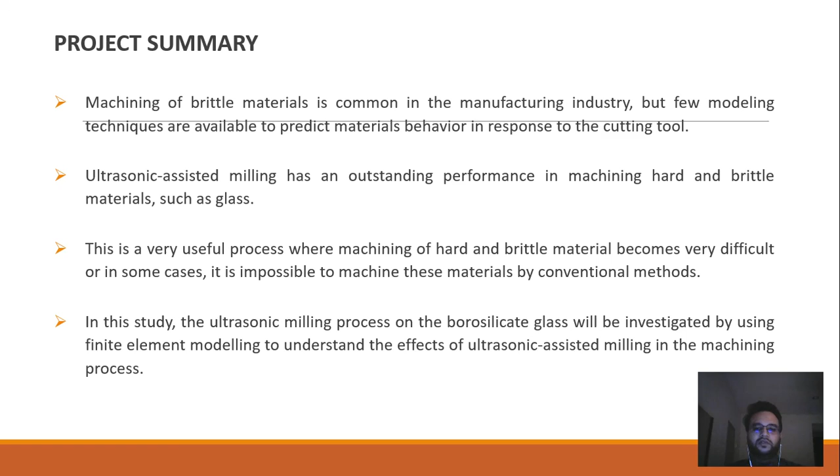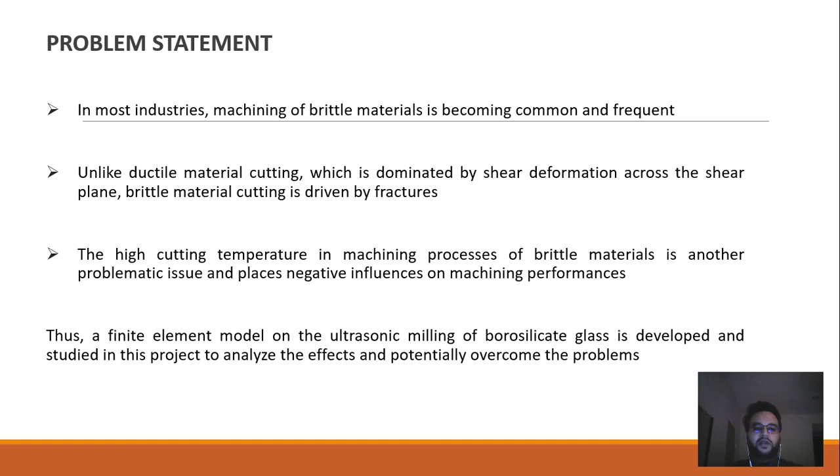Moving on to the problem statement. In most industries, machining of brittle materials is becoming common and frequent. Unlike ductile material cutting, which is dominated by shear deformation across the shear plane, brittle material cutting is driven by fractures. The high cutting temperature in machining processes of brittle materials is another problematic issue and places negative influences on machining performance. Thus, a finite element model on the ultrasonic milling of borosilicate glass is developed and studied in this project to analyze the effects and potentially overcome the problems.

Moving on to the objectives of this project. The first objective is to model an ultrasonic assisted milling process for borosilicate glass using finite element modeling, done using Abaqus software. The next objective is to investigate the effects of the ultrasonic assisted milling process on borosilicate glass, mainly focusing on whether the borosilicate glass is damaged or cracked during the cutting process. The last objective is to validate the ultrasonic assisted milling model with the results of a journal article.

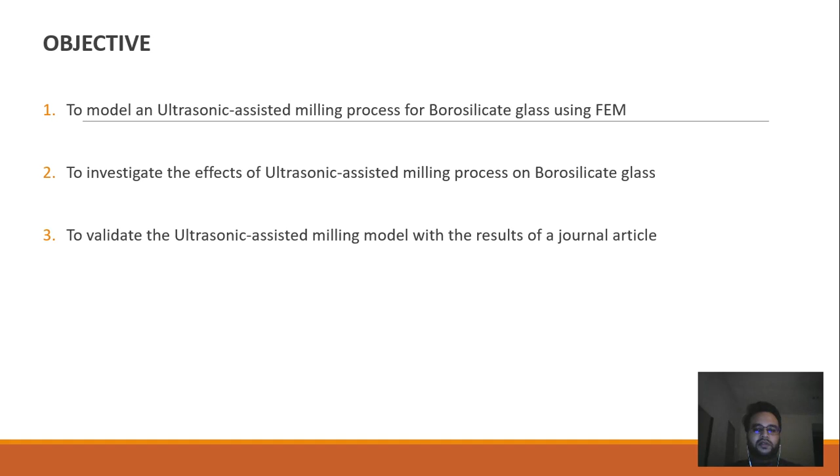Moving on to the project scope and limitations. The scope of this study focuses on creating a suitable finite element model that can undergo the machining process where the tool is able to cut the workpiece as intended. The workpiece with the properties of borosilicate glass is used in the finite element modeling. Some limitations and considerations need to be focused on for the finite element modeling to be successful, such as the type of material, the design or shape of the tool, the input parameters used in the simulation, and the response parameters such as cutting rate, force, and chip formation.

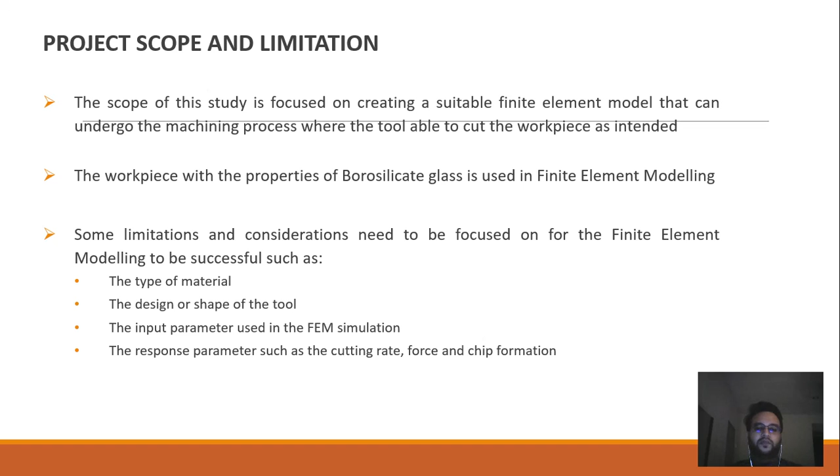Moving on to the literature review. The first literature review is on finite element modeling, which is a simulating process to determine response parameters of the machining process, such as cutting force and chip formation, assessed using the finite element method. Finite element modeling consists of two components: pre-processing and post-processing. Mesh size and order are crucial to create a balance between accuracy of results and runtime. In pre-processing, the main focuses are to assign the type of element, insert material properties, use appropriate mesh elements, and apply boundary conditions in the form of load and structure. In post-processing, the main focus is to generate the desired output or results, such as the cutting force, accurately.

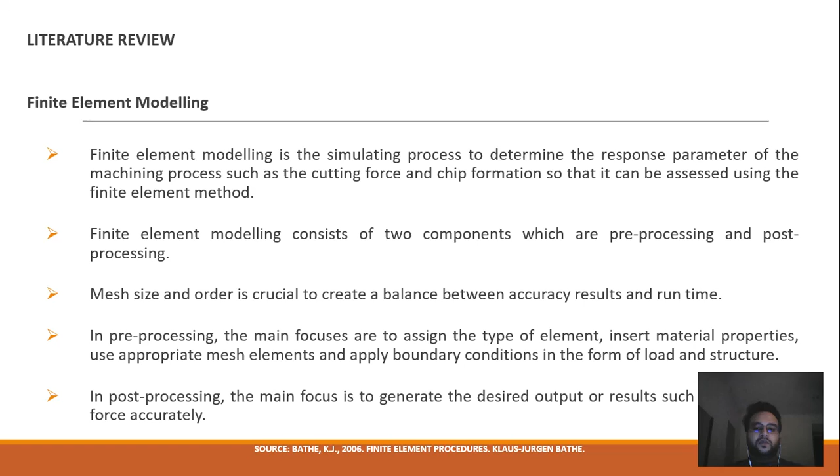The next literature review is on failure criteria and cutting force. Machining of titanium alloy was investigated by 2D finite element analysis to understand the effects of ultrasonic machining. The workpiece material of titanium alloy was modeled as plastic, and to observe the effect of failure criteria, conventional turning simulations were run with and without failure criteria. Serrated chip formation is obtained in simulations with failure criteria, while chip shape is smooth in simulations without failure criteria.

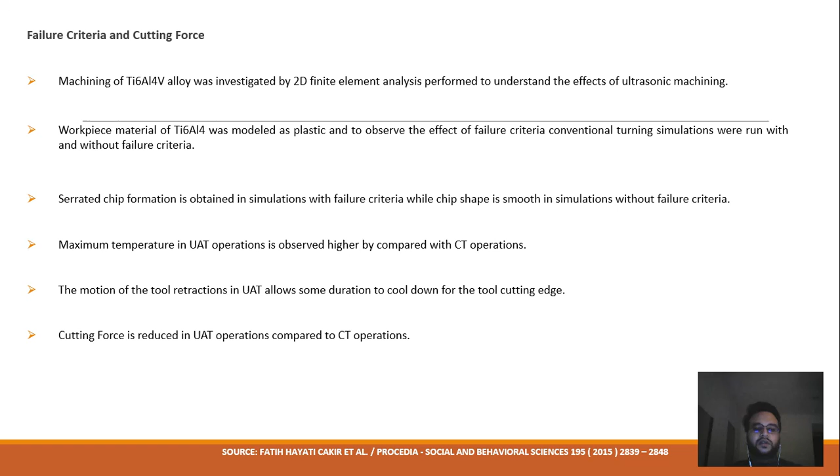Maximum temperature in ultrasonic assisted turning operations is higher compared with conventional turning operations. The motion of tool retractions in ultrasonic assisted turning allows some duration to cool down the tool cutting edge. Cutting force is reduced in ultrasonic assisted turning operations compared to conventional turning operations. This is the cutting force for conventional turning and ultrasonic assisted turning for the titanium alloy, as done in the previous literature review.

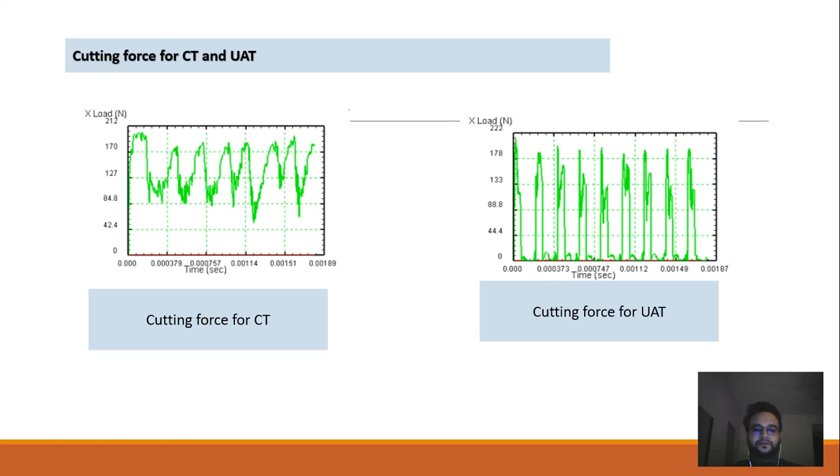Moving on to the methodology of this project. The first step is to do research and data collection. In this step, all the machining parameters and properties of the workpiece and tool are researched and collected. Then, testing the finite element model in Abaqus takes place, done by referring to journal articles, researchers, and also the internet.

Next, we move on to create the finite element model, where all the data from the research and data collection step is used to create the model, run the simulation, and observe the cutting process. If this step is successful, we move on to the last step, analyzing the data. If not successful, it is required to start the step from the beginning. The last step is analyzing the data, where all the data is analyzed and compared with other data from researchers and the internet.

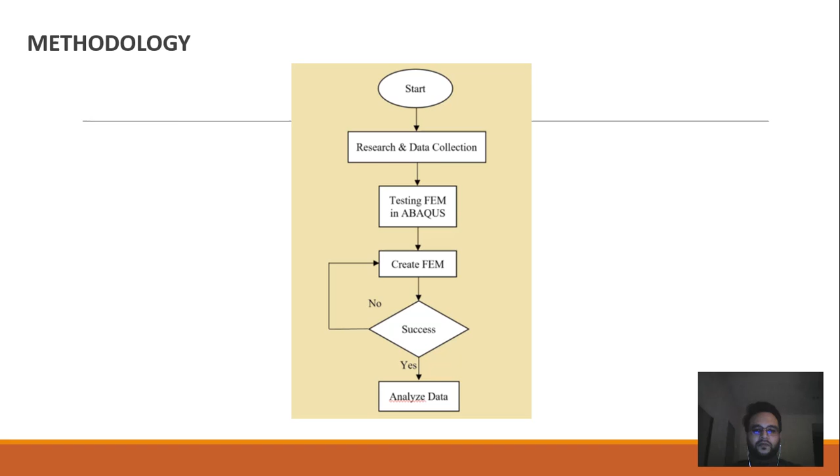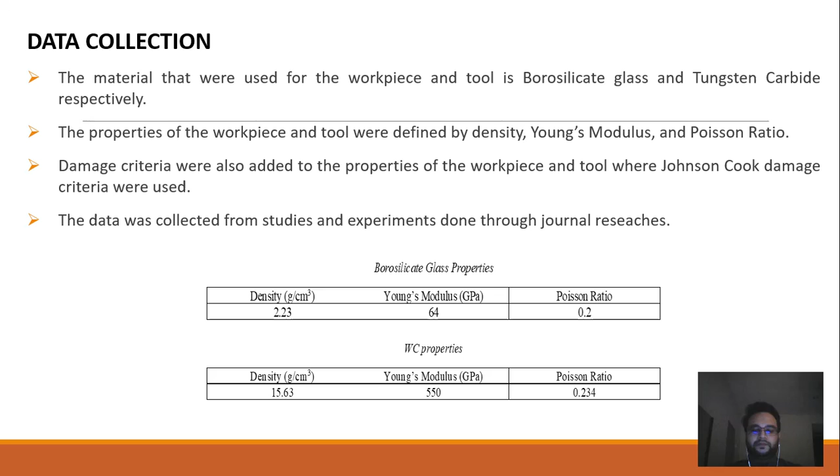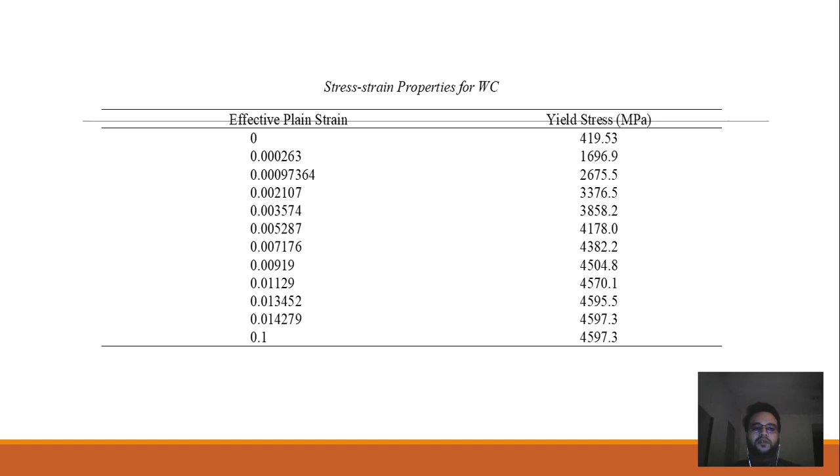This is the stress-strain properties for the tungsten carbide, which is the tool. As you can see, as the effective plane strain increases, the yield stress also increases. This property was referred from researchers and the internet.

The Johnson-Cook damage failure model was added into the finite element model to account for the chip separation process. This allowed the cutting tool to move freely without causing substantial mesh distortion near the tool tip.

D1 is the initial failure strain, D2 is the exponential factor, D3 is the triaxiality factor, D4 is the strain rate factor, and D5 is the temperature factor.

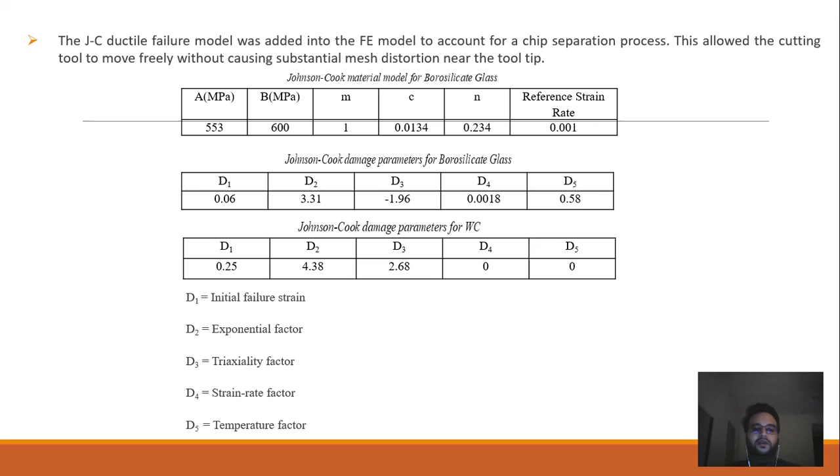The workpiece has a length of 5 mm and a width of 4 mm, the velocity of the cutting tool is 90 m per minute, and the depth of cut is 0.1 mm.

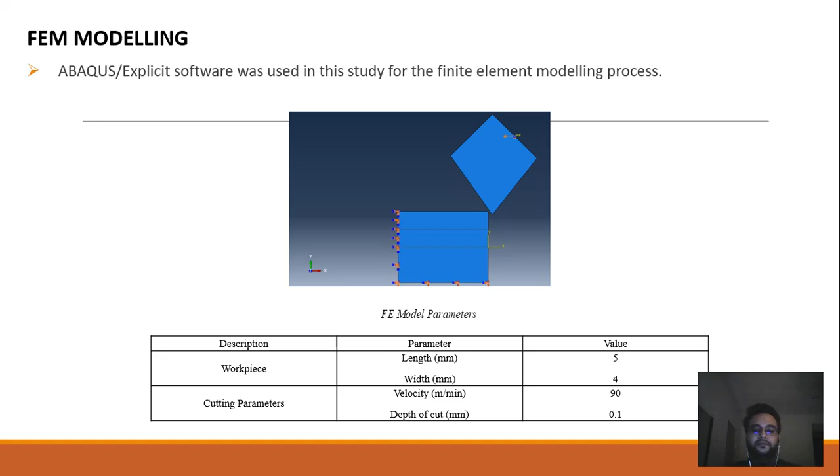As for the mesh, the workpiece is divided into 3 parts. The top part, where the cutting process takes place, has an element size of 0.00005, the middle part has an element size of 0.001, and the bottom part has an element size of 0.00025.

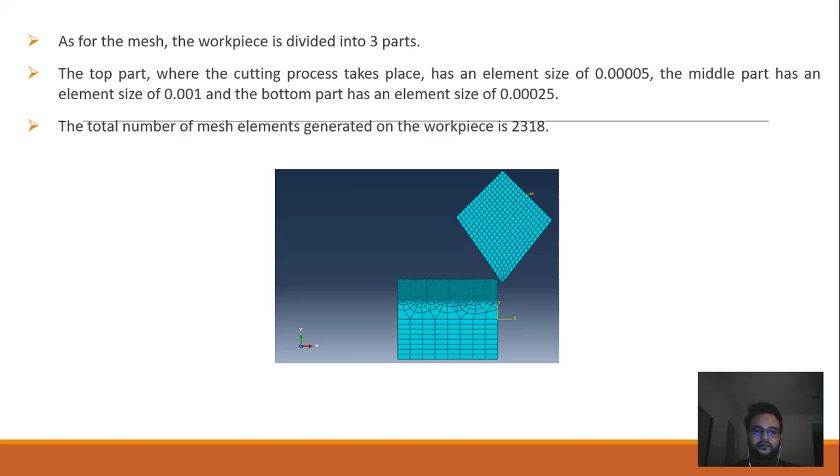Next, we move on to the results and discussion. The first result achieved is that the tool is able to undergo the cutting process on the borosilicate glass without causing any damage. Reduction in simulation time was achieved by reducing excessive distortion in the chip separation region.

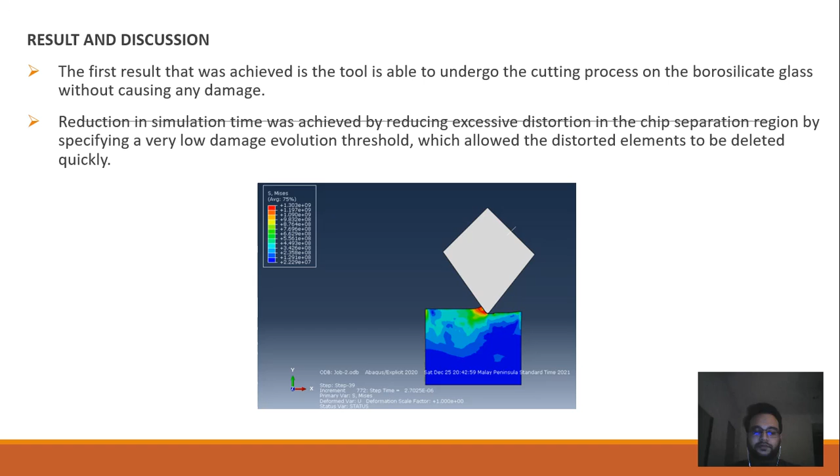Chip creation must be accompanied by fracture criteria that may be used to determine when the material is separated from the workpiece, resulting in the production of chips.

The figure below shows the finite element model simulation of the cutting process with damage criteria, which is the Johnson-Cook damage criteria defined on the workpiece.

This shows that the results of the cutting simulation are more accurate as it resembles the actual cutting process and could predict the actual material behavior during the cutting process in real life or experiments. Therefore, damage criteria are an essential feature to be defined in material properties for finite element modeling and simulation.

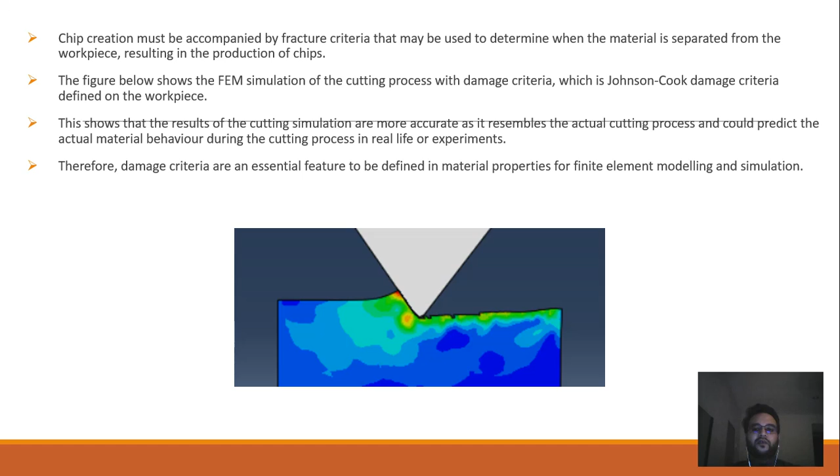The next result achieved is that the tool is able to demonstrate an ultrasonic vibration cutting process on the workpiece, as well as generate the force that shows the motion of ultrasonic vibration.

According to the simulation, the material is intermittently removed in the ultrasonic assisted milling process. Over the course of a whole vibration cycle with time period T, it only engaged at the period corresponding to the workpiece cutting portion.

As a result, the force diminishes throughout the course of a vibration cycle. The force generated during the machining process used in the ultrasonic assisted milling method is far less than that used in traditional machining. This is because the tool does not come into direct contact with the substrate during the ultrasonic assisted milling process, meaning the tool vibrates during the cutting process.

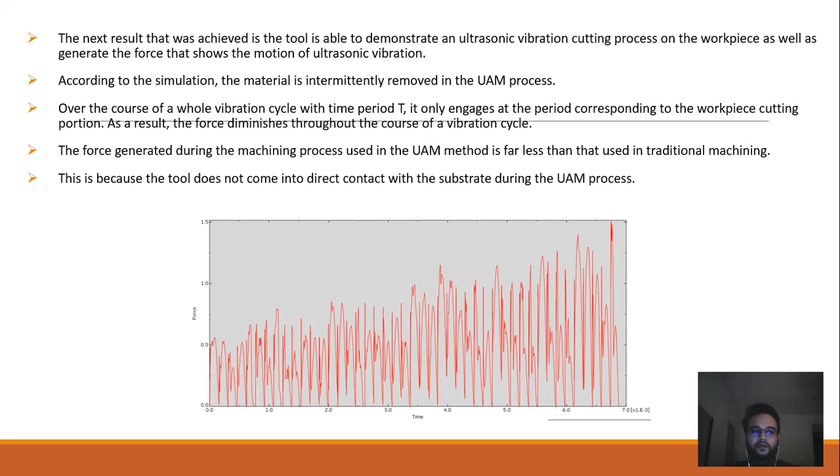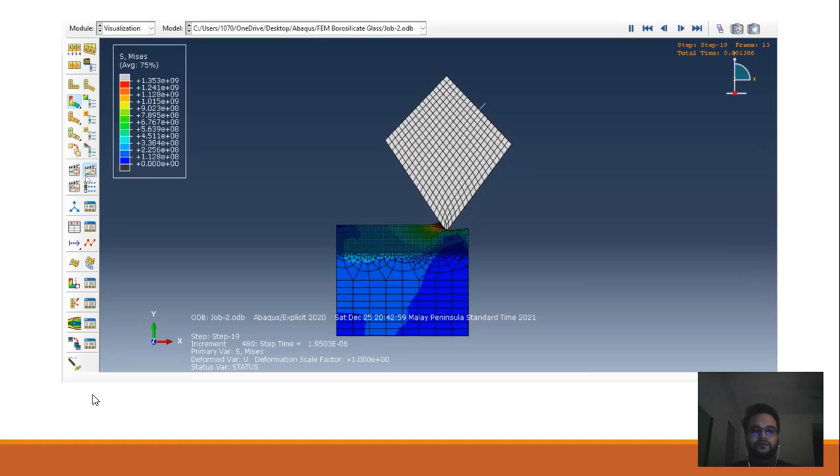Next, we move on to the conclusion. Finite element modeling simulation is also an effective method in order to predict material behavior during the cutting process, as well as ensure the suitable parameters and properties needed to carry out the machining process in real life or experimentally.

Modeling with finite element programs enables the production of partition lines inside the model, which were used in this study to improve the accuracy of the results.

The definition of damage criteria in finite element modeling simulations is also essential in order to predict and obtain accurate results. Force during the machining process is much less and more effective when using ultrasonic machining for brittle materials, to avoid fracture or cracking in the workpiece.

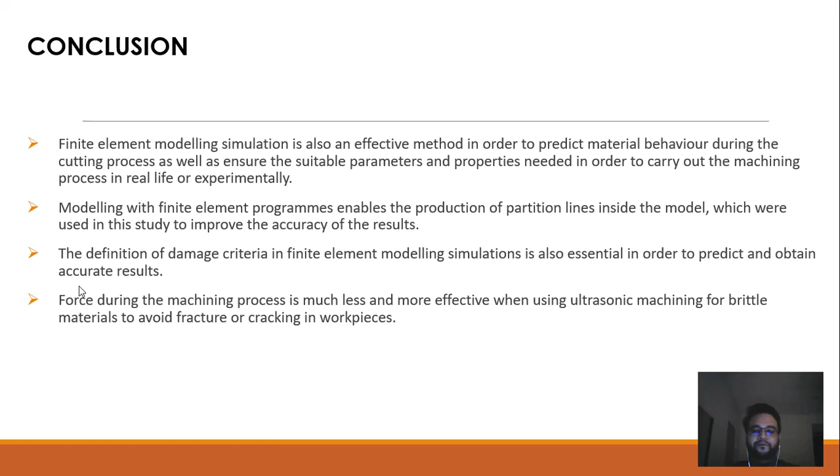Next, we move on to the references. Some of the references that were used in this project.